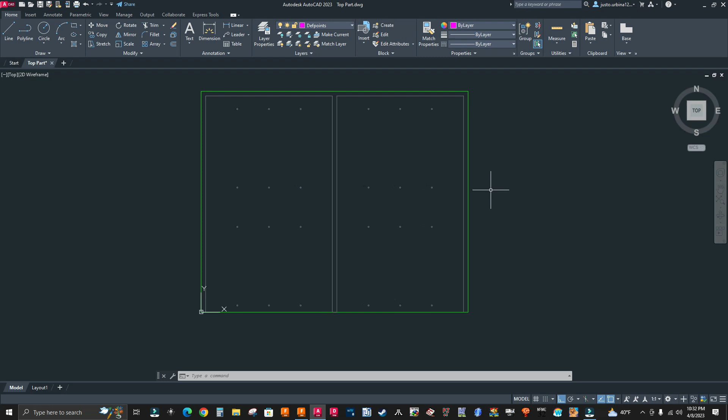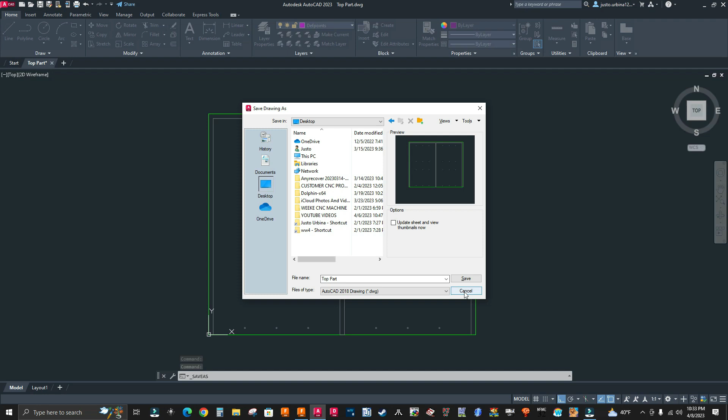I want to import this into Fusion 360 as a DWG file format. So I'm going to go to the File menu, select Save As, and save as a DWG file format. I'm going to go to my desktop and save it there. I'll select save, and select update relative paths recommended.

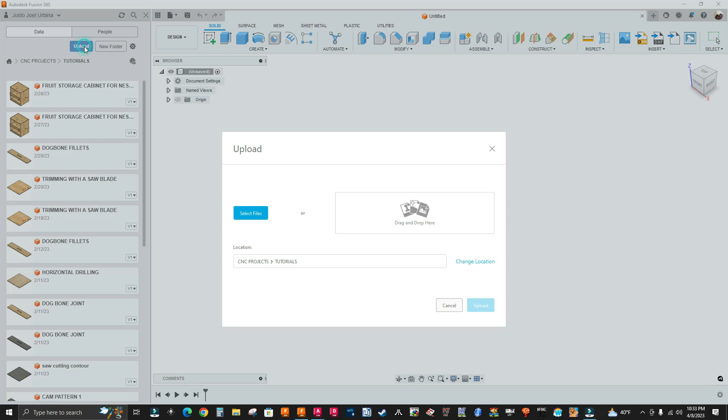Now I'm going to go to Fusion 360, show data panel, upload, select files, and select the file right here. Select open, select upload.

Now the file is being uploaded. I have a status bar right here. The bigger the file is, the longer it's going to take to upload in Fusion 360. Okay, status complete.

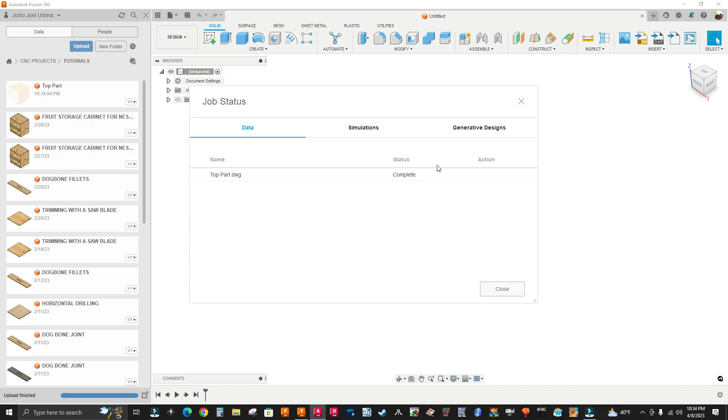So I'm going to close this window. So you have the file right here, but you see I'm getting some extra stuff. Let me right click, open. Now I got a bunch of sketches that I don't want. All of this is going to slow down Fusion 360.

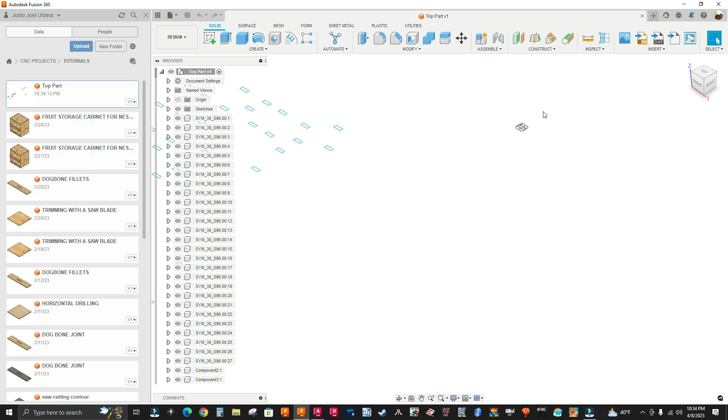So I've got to zoom in and find the top part, the sketch, which is right here. I'm going to have to delete all of this stuff right here.

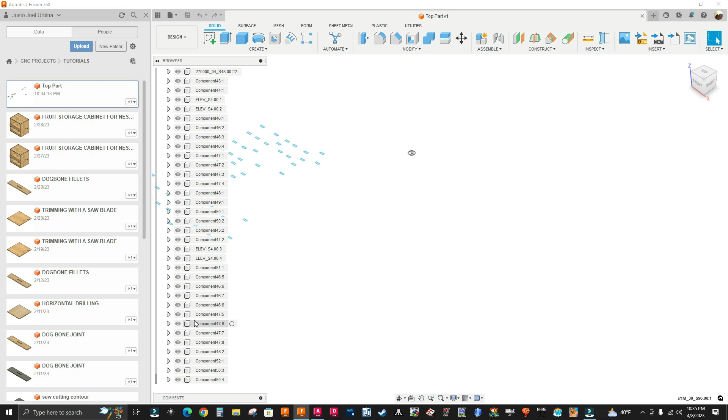I'm going to select the first one, hold down the Shift key on my keyboard, select the slider on the left, and drag it all the way down. While holding down the shift key, I'm going to select the last component, right click, delete. I'm going to click on the home icon.

There's that 2D sketch that I want to work with. Okay, so that's the DWG file, so I can just extrude it and make a 3D model.

Let me extrude it real quick so you can see. Before that, I'm going to right click, select capture design history. Now I have the design history timeline right here.

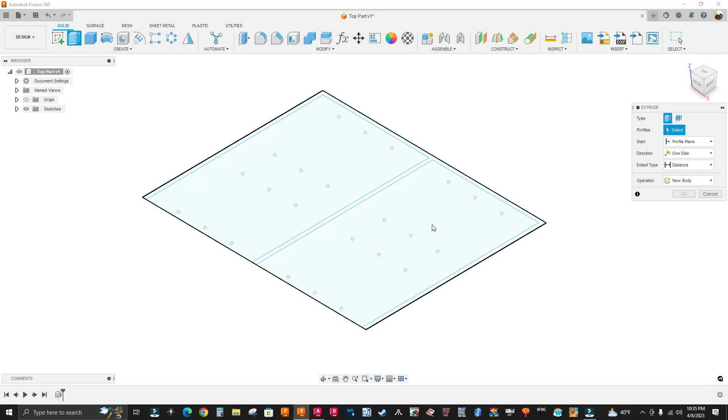So I can select extrude. See, it's hard to select the profile here. So I'm going to extrude it, type 18 millimeters, set operation to new component, and click OK.

I'm going to turn off the sketch. Clicking this arrow, I'm going to turn off that dim 8, dim 24, dim F, and panel 8. Actually no, I'm going to leave it on because I want to extrude the holes, I'm going to have through holes.

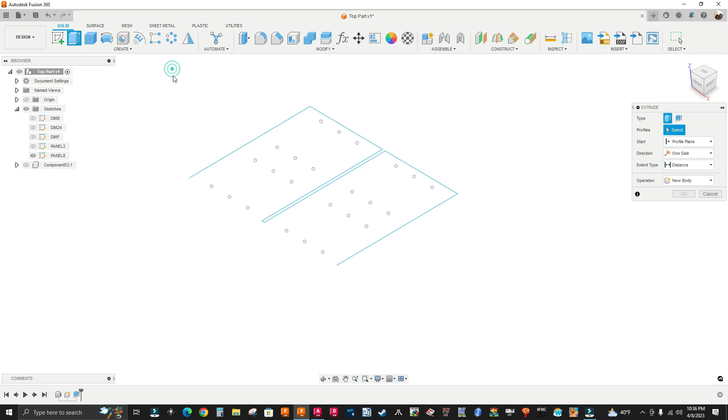So let me turn off the component, and I'm going to select extrude. I'm going to window select the profile. I got 24 profiles selected.

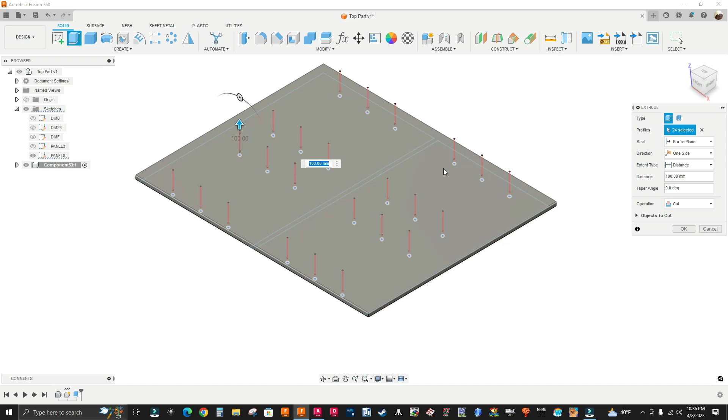I'm going to turn my component back on and drag the arrow up to extrude and create the through holes. See, the operation is set to cut. So I'm going to click OK.

Now I got the through holes. I'm going to have to turn the panel 8 sketch back on. Now I'm going to have to extrude the grooves.

But you see, it's hard for me to select this, so I'm going to have to rotate the model. See, but I can't select the profile, I don't have a closed profile here. So I can select this right here to extrude.

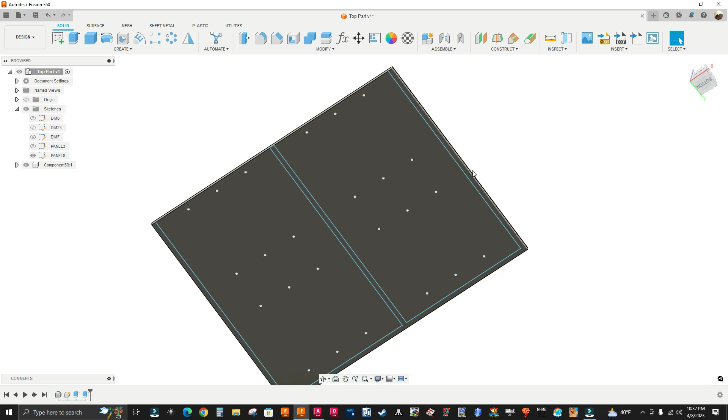So I can see it takes a lot of work to work with an AutoCAD file when you import a DWG file into Fusion 360. So I don't want to play around with this anymore, I don't want this video to be long.

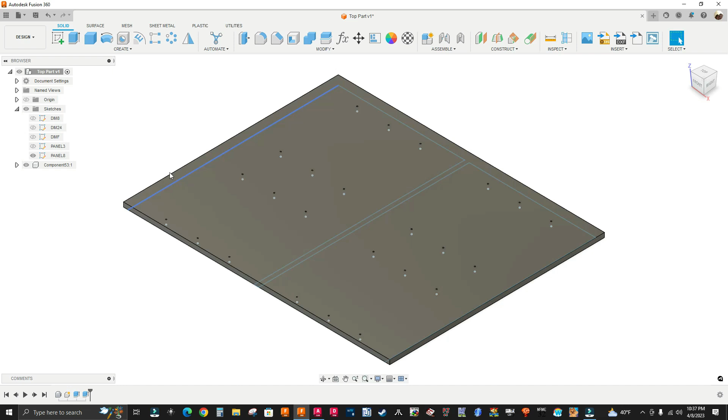So let me go back to AutoCAD. You can import these files, the DWG, but before that, let me show you the layers that I have. This drawing has so many layers, and only one layer I want, which is panel 3.

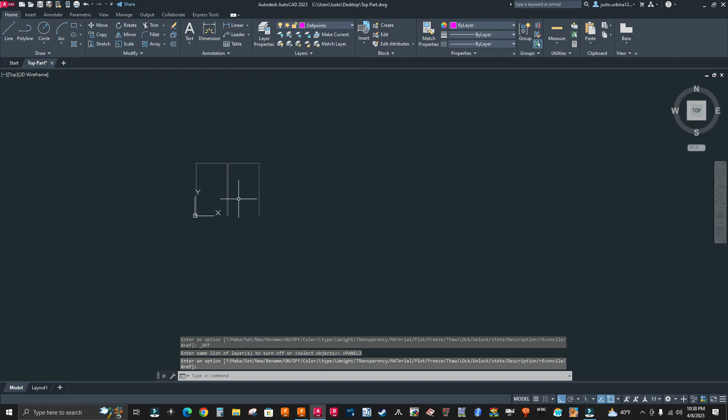So I'm going to turn off panel 3. I'm going to window select the profile, set the profiles to panel 3, close this, go to my layers, go to panel 3, and turn this back on. Okay, that's what I want.

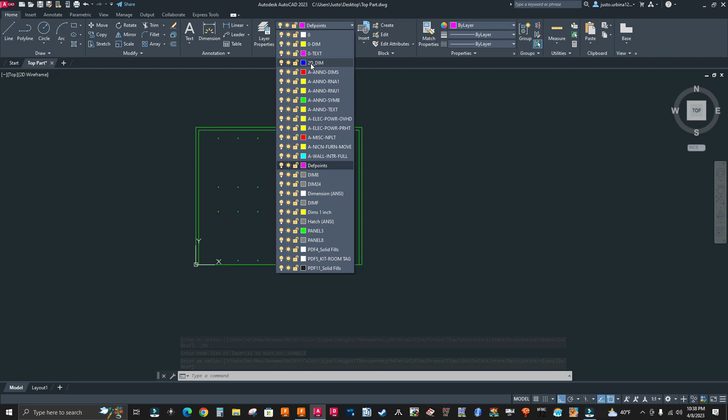So I can still turn every single layer on if I want, or turn every layer off if I want. But you see, I have so many layers, so I don't want to do that.

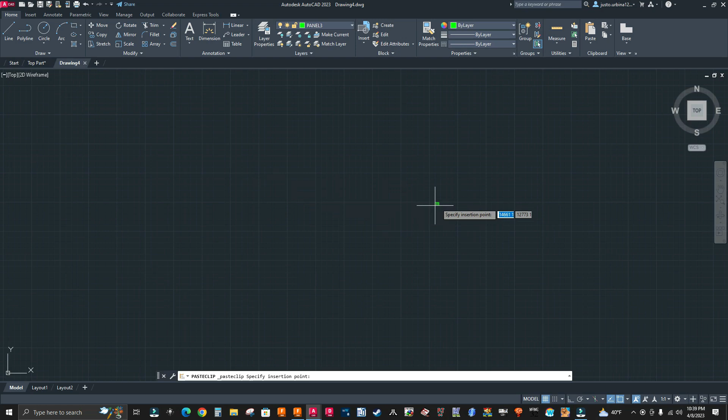So I'm just going to copy these profiles, window select, and hit Control C on my keyboard to copy. Start a new drawing, Control V to paste, and I'm going to place it right there and zoom in.

Now I have fewer layers. So if I import this into Fusion 360, I should have just this profile. So let's see that.

So let me save this, save this as a drawing DWG file format, and it's going to be drawing 4. Let's save it. I'm going to go back to Fusion 360.

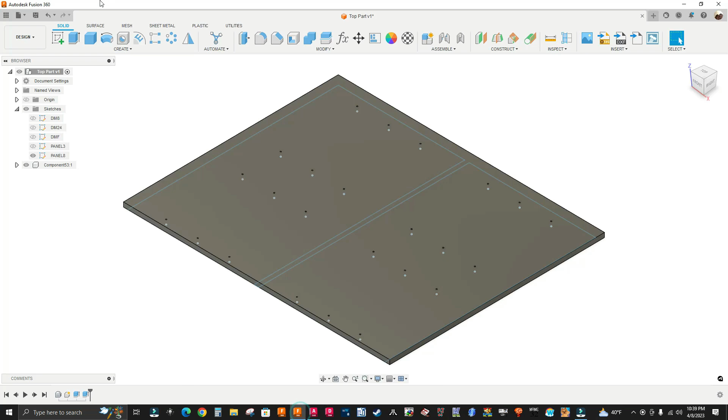Show data panel, upload, select files, drawing 4. I'm going to open it up in Fusion 360. Upload.

You see, it's still taking some time to upload in Fusion 360.

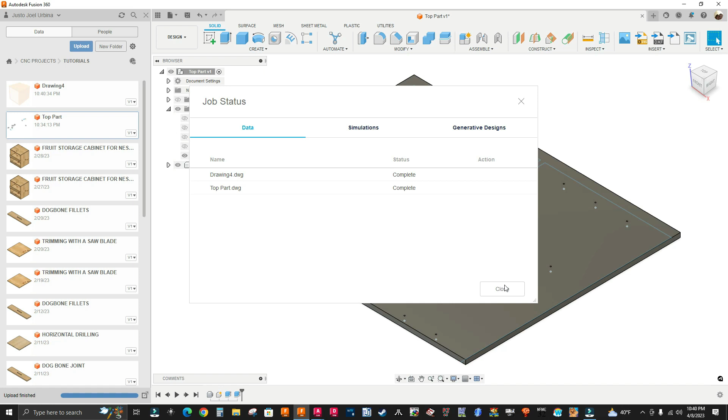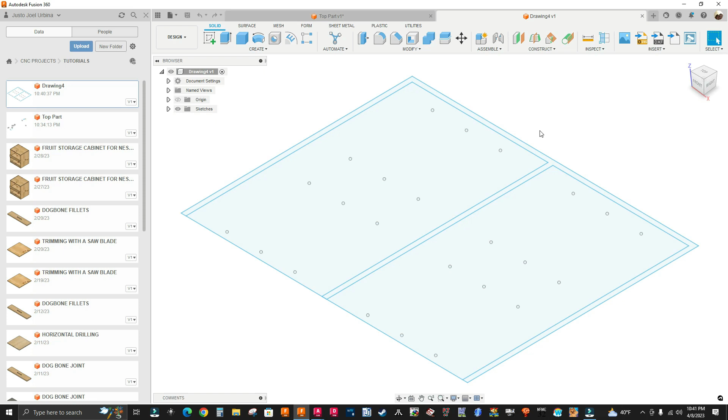So I'm gonna close this window. I see the sketch of the profiles that I want, so let me right click, open. Bingo, you see that? Nice and clean. You don't see those extra sketches and components, all that stuff that you don't want. So that's one way to bring a clean sketch into Fusion 360 to work with.

Now let me show you that you can bring this AutoCAD file in as a DXF file instead. So let me go back to AutoCAD.

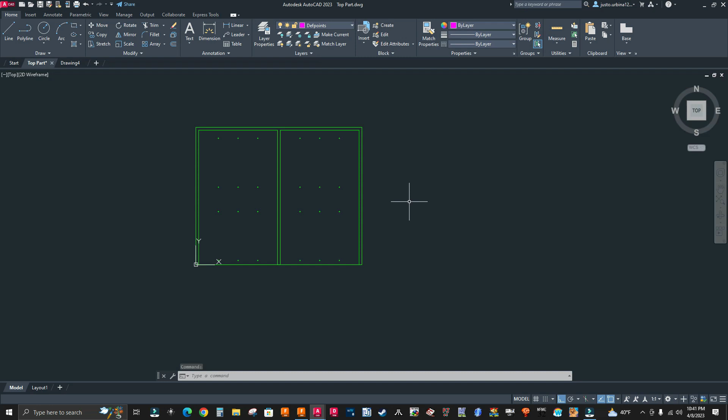I'm gonna go to the top part, because this one has all of these layers right here. So I'm gonna save this as a DXF file. I'll type DXF out, hit enter, save it to the desktop as top part DXF, and save it. Now I'm gonna go to Fusion 360.

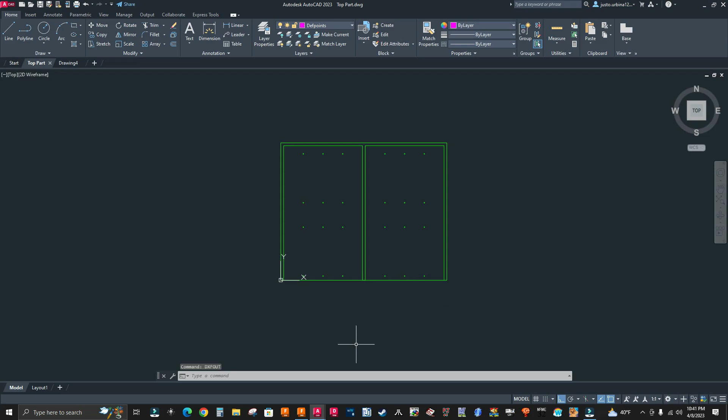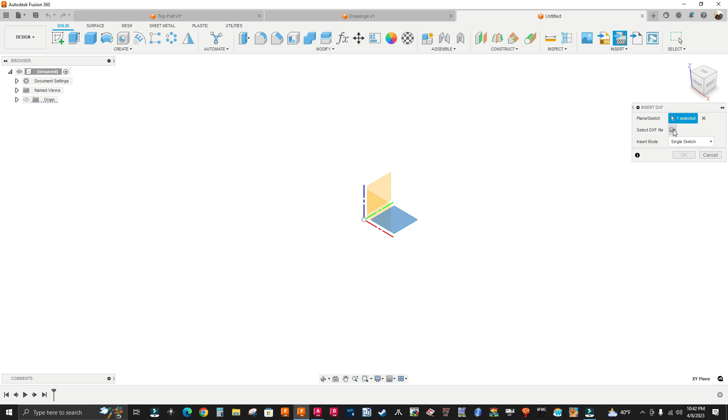I'm gonna go to new design, and select, right here under the insert tab toolbar or menu, DXF. I'll select the bottom plane, click on this folder, and there's that DXF file. See it right here? I'm gonna click on open.

You see, it takes way faster to bring this file into Fusion 360 as a DXF file format, way faster than bringing this file as a DWG file.

So I would do it this way. If I work with AutoCAD files at work, I just tell the drafter or the architect to save those 2D sketches as a DXF file. It's faster for me to import these files into Fusion 360 and start working with them, like extruding the profiles and then programming them for the CNC machine. So this is way faster.

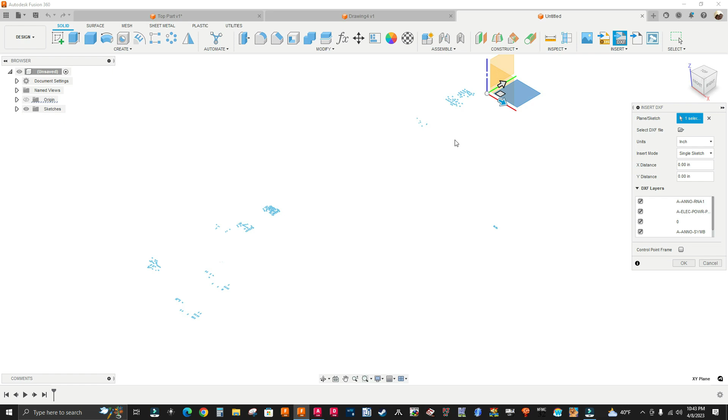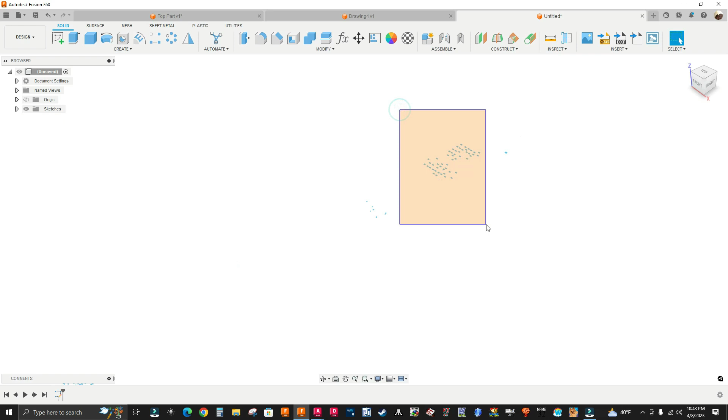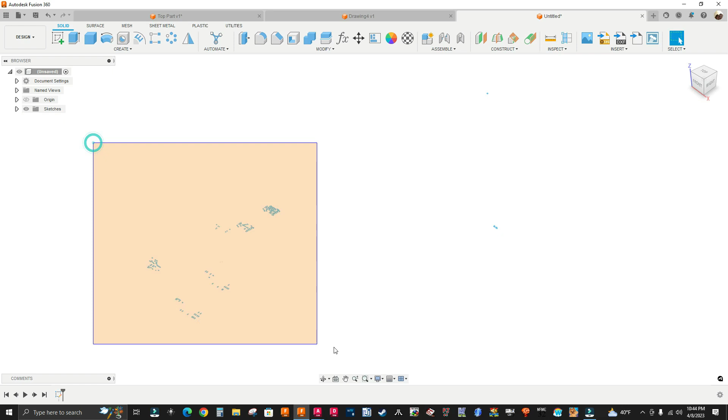But you still don't want to deal with these extra sketches, so I'm gonna click OK, and look for the top panel, which is right here. I'm gonna zoom out, and you can just window select the other profiles that you don't want, then hit delete key to delete them. Let me zoom out, I've got more right here, window select, delete key. I'm gonna click on the home icon. I've got more right here, select all of them, delete key.

Now they're deleted. I'm gonna click on the home icon. There's the profile that I want, so I can just extrude this. Let me right click. Actually, I have capture design history activated already, so I don't have to activate it here. See the timeline? I have it right there, so that's good.

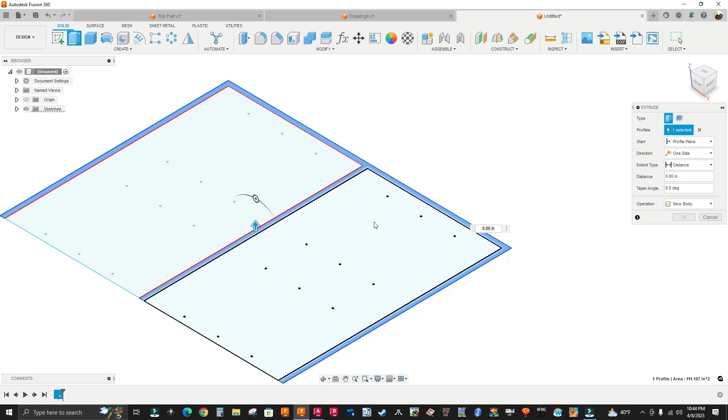So it's gonna be easy to extrude these profiles. I'm gonna select extrude, and select this profile, and this one. I'm gonna type 0.75 inches. Operation, new component. Click OK. See that? Now I've got through holes.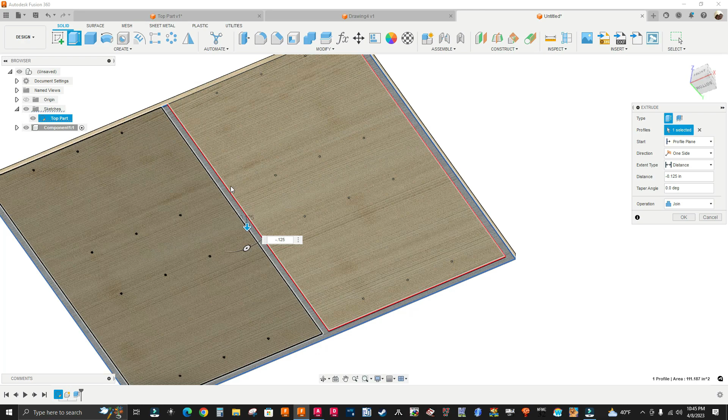Now I can just right click, repeat extrude. I'm gonna go to sketches, turn that sketch back on. I'll rotate the model and select this profile right here, and type minus... actually it's joining, so it has to be a positive value. See, that's creating it, extruding out. I want to cut into this part, so I'll type a positive value. 0.125 is gonna cut into it. The operation is set to cut now. I'm gonna click OK.

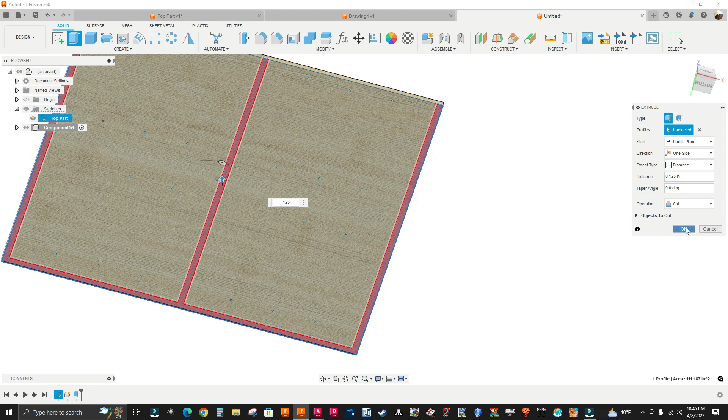I'm gonna turn off the sketch. This is my top panel. Okay, or you can do it differently if you want.

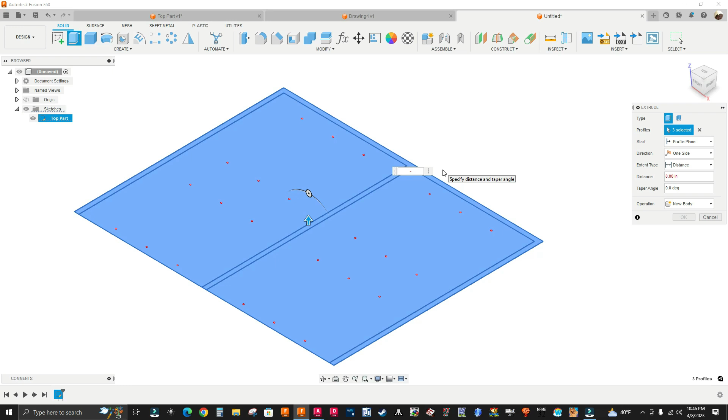Watch this. I'm gonna drag this slider right here, go all the way back to that sketch, right click, delete all features after the history marker. I'm gonna select extrude. That sketch is off, so I'll turn it back on. I'm gonna select this profile, and this one right here, and type minus 0.75. Operation, new component, click OK. I'm gonna right click, repeat extrude, and select this profile right here for the grooves. I'll type minus 0.125. It's cutting into it, see, it says cut. Click OK. I'm gonna turn off the 2D sketch. That's it.

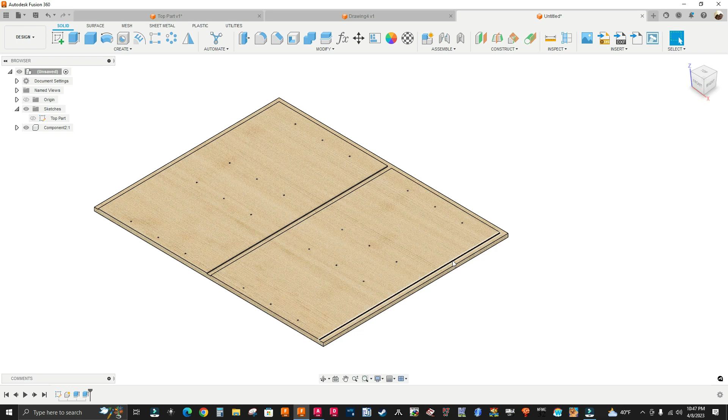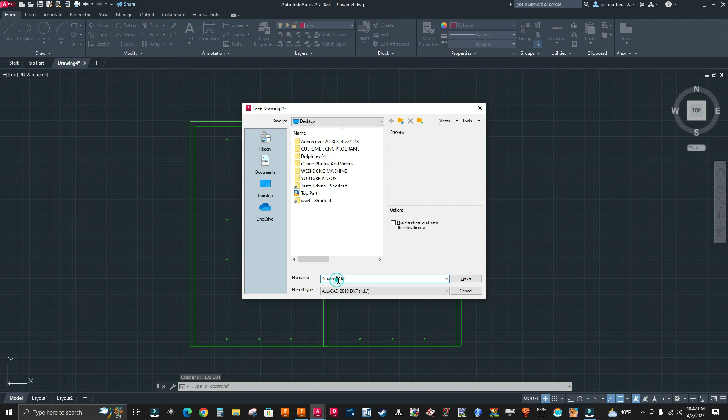Now let me import this file as a DXF file, but just this profile that I want, the top panel. So let me go to new design, and go back to AutoCAD. I've got drawing 4, and I don't have that many layers. So I'm gonna save this as a DXF file, type DXF out, hit enter, save to desktop and name this drawing 5. I'll save it, and go to Fusion 360, DXF.

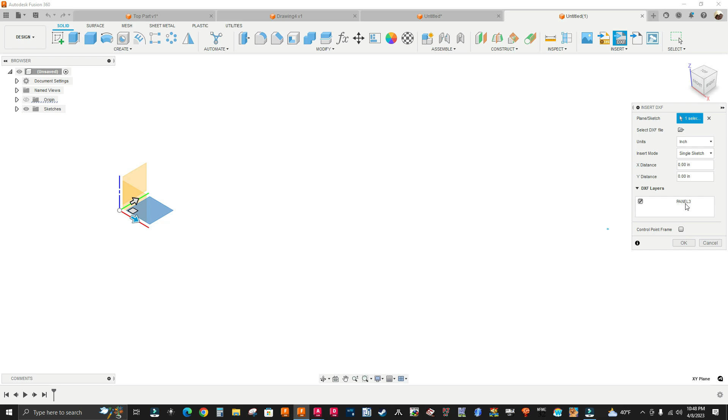I'm gonna select the bottom plane, select the folder, and there's the drawing file, DXF. Open, and there it is. I'm gonna click OK. See that? Only one layer, panel 3 layer. I'm gonna click OK, and click on the home icon. Bam, there you have it.

So I showed you the problems that you're gonna run into when you're importing DWG files into Fusion 360. I also showed you which file format uploads faster in Fusion 360, and as you saw, DXF file format was way faster, way faster than DWG file format.